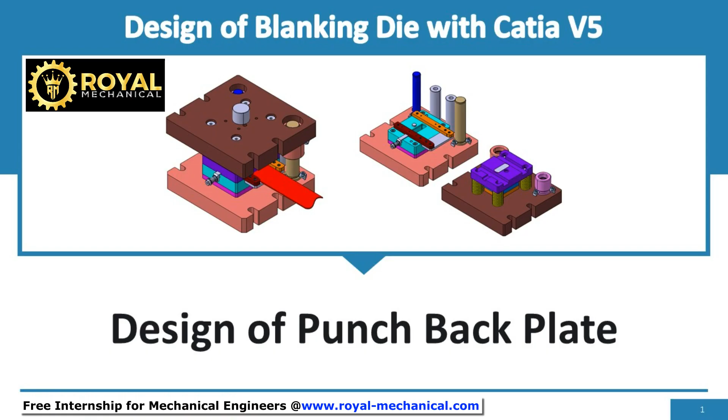Welcome. In this e-learning module, I shall demonstrate and make you understand how to design the punchback plate using Catia v5. The function of the punchback plate is to absorb the force coming from the punch. The length and width of the punchback plate will be the same as the punch holder. Generally, the thickness will be 8 mm to 12 mm but can also be more.

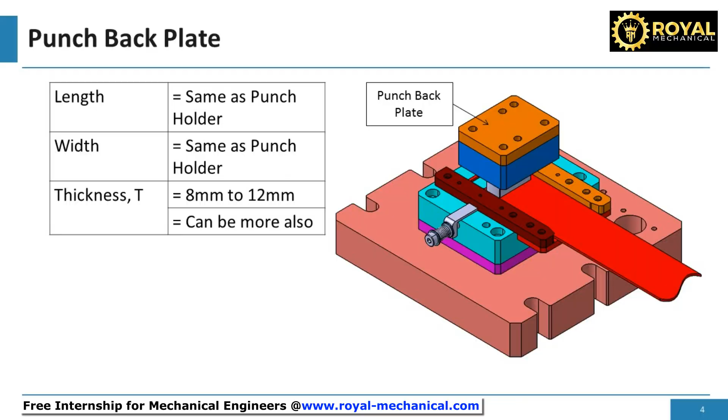Now let me demonstrate how to design the punchback plate in Catia v5. To design the punchback plate, let's use the punch holder. Let's save this punch holder as a punchback plate. Click on the file, Save As. Don't forget to click on Save as New Document, as we need a new file named punchback plate. Change the file name as a punchback plate. Then save the file.

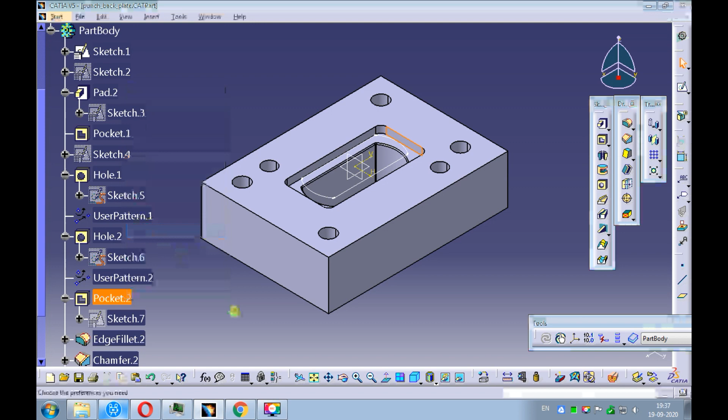Open the punchback plate. We don't need the pocket created for the punch head. Delete it. We also don't need the pocket created for positioning the punch. Delete it.

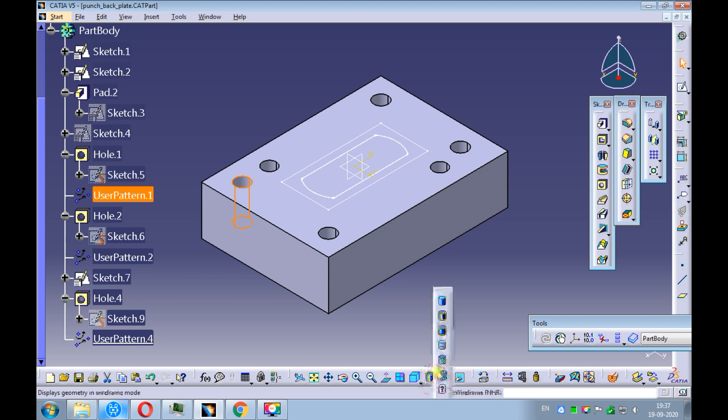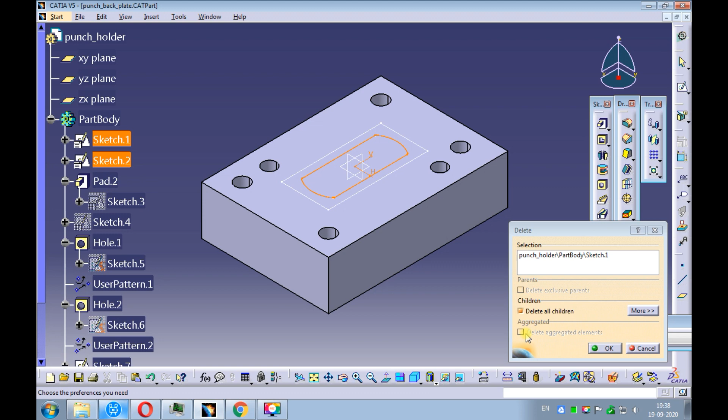Convert the counterbore hole created for the M10 screw to a clearance hole of dia 10.5 mm. Delete the Sketch 1 and Sketch 2 created for the blank shape and punch shape. Also, delete the unwanted Sketch 7.

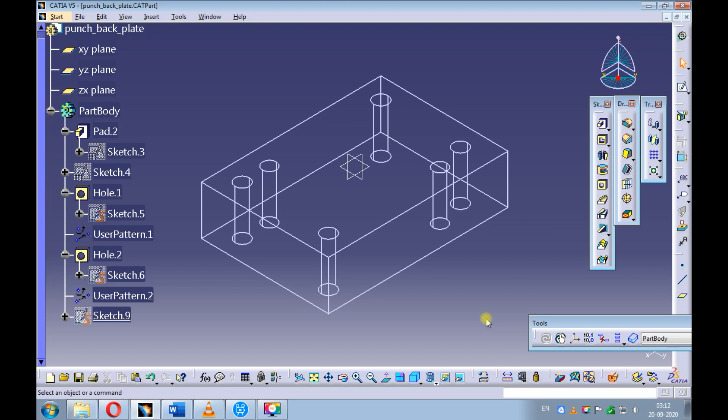Delete the relief hole provided for the dowel holes. Update the thickness of the punchback plate to 10 mm. Save the punchback plate. Swap the window to punch assembly. Assemble the punchback plate to the punch assembly using the existing component command.

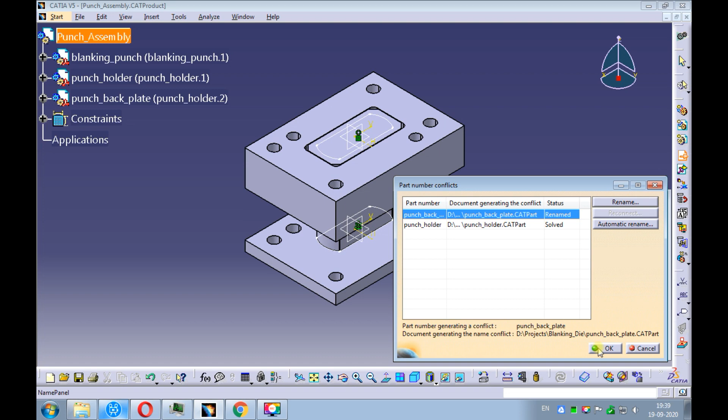Resolve the part number conflict. Enter the new part number as a punchback plate. Provide a coincidence constraint between the punchback plate's front surface and the punch holder's front surface. Provide a coincidence constraint between the punchback plate's right surface and the punch holder's right surface.

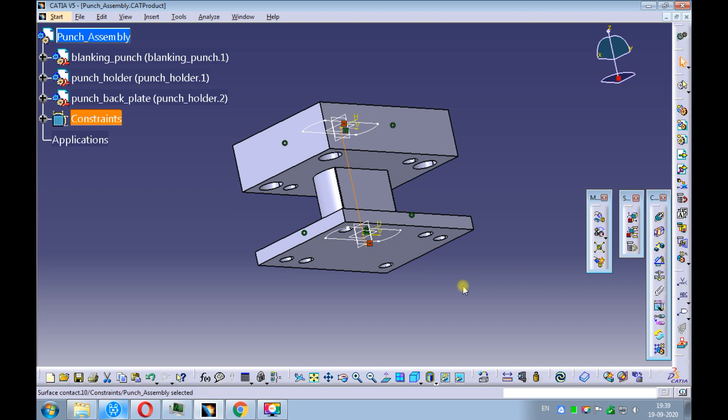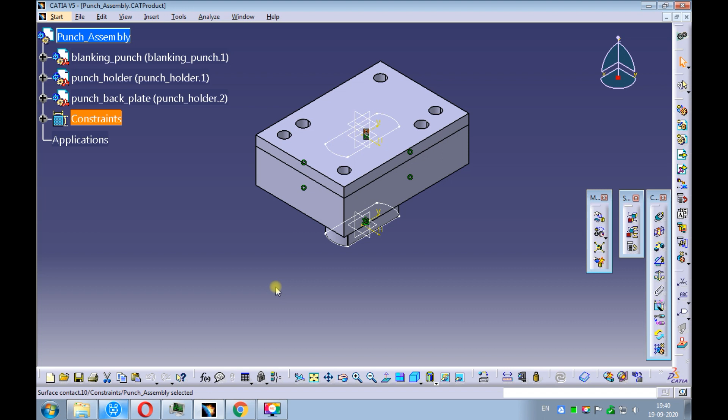Provide a contact constraint between the top surface of the punch holder and the punchback plate's bottom surface. Set the view to isometric and fit all in. Update the assembly. Save the punch assembly. Save all, to save all the modified files in session. With this, we have successfully designed the punchback plate using CATIA V5.